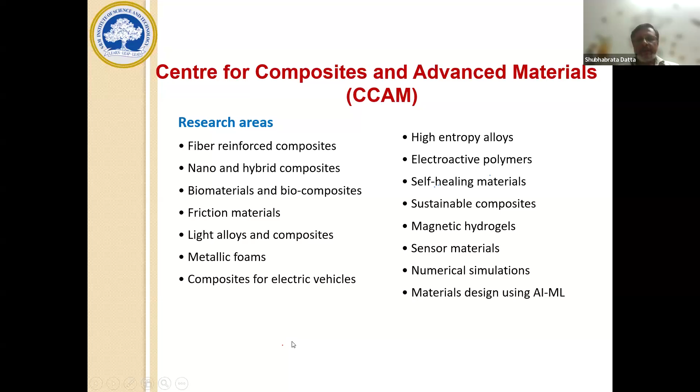In case of all these materials, we do both computations and experimental work. So we have the facilities for both. You can see some research facilities of the center. We have a decent facility for synthesizing composite materials and other materials, both metal matrix composites and polymer matrix composites. We also have a decent simulation infrastructure for finite element analysis, for different multi-scale modeling techniques, and of course AI/ML. So this is a little bit of background of our center.

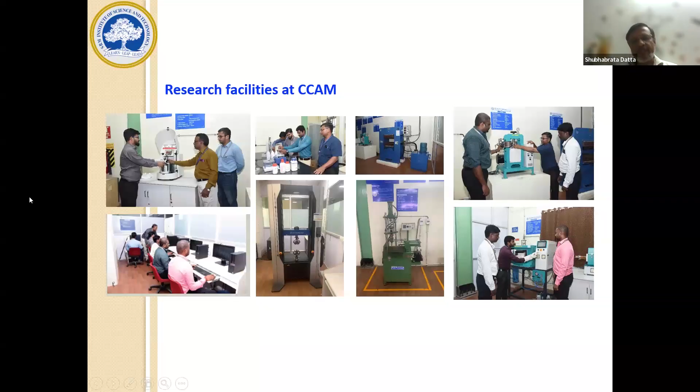Let us come to the lecture. My lecture will start with the concept of design of materials, how a material can be designed. In this case, I'll focus on designing composite materials. Then the concept of materials informatics, how data-driven models and machine learning can be used for designing new materials with improved performance and properties. A little bit on design optimization, where we use a lot of optimization algorithms for designing materials—that concept also I'll explain.

After this introductory part, I'll go for some case studies. I'll try to cover three case studies: the first one on metal matrix composites, then one on polymer matrix composite with particulate reinforcement, and the last one, polymer matrix composite with continuous fibers. But all three applications will be in the field of biomedical implants.

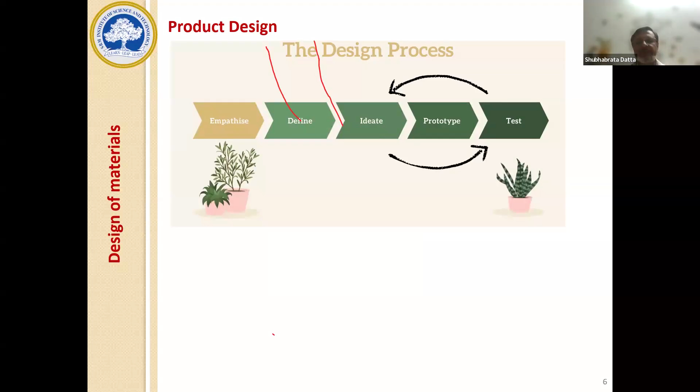So first, to start with design of materials. Any product design, if you know these things, starts with empathize, then we define the problem, ideate the problem, create some prototype, then test the prototype. Whatever shortcoming we find, we come back to the ideate part, try to find the solution, make the prototype and test. This is the basic concept of designing anything.

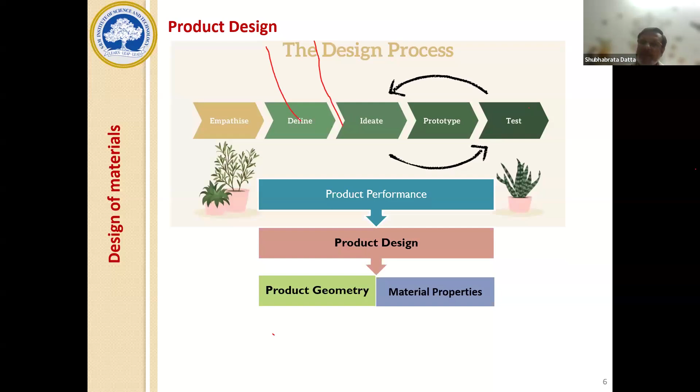Now in case of a material, or any product made from materials, product performance depends on the product design. Product design depends on two things: one is the product geometry, any component, any machine we are making has this geometry part, and second is the material's property.

When we are trying to design a material property, or achieve a certain property in any material, we have two things in our hand which we can control: composition and processing. Composition and processing leads to the microstructure, microstructure leads to the property, and property leads to performance.

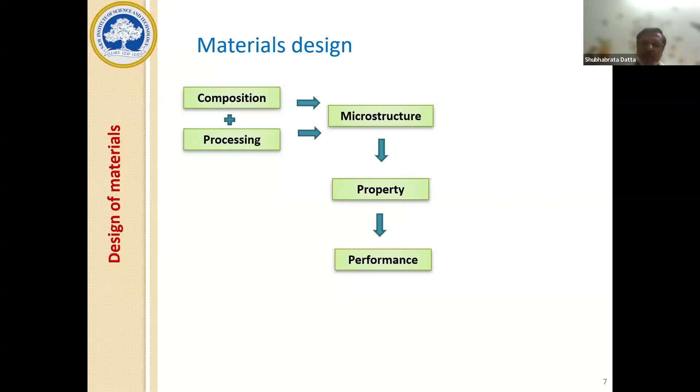Performance means for a particular application we may need a combination of several properties, maybe strength, maybe corrosion resistance, maybe something else, maybe a combination of some conflicting properties. All these things come into picture.

If stiffness is not enough, it can bend upwards. If the strength is not enough, it can break. If the toughness is not enough, it can go for brittle failures. If it is too heavy, the weight is high, then also we can face problems. So there are several properties, a combination of which actually leads to the performance of any material when applied to a particular application.

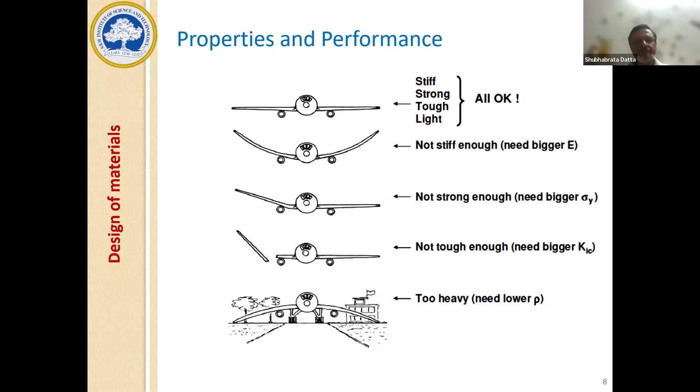Coming to a little bit of evolution of materials, the application of materials has changed with time. Majority of materials were initially polymers, mostly natural polymers like wood, skin, fibers, before the Christ era situation. Then composites were there, like straw brick, papers, ceramic glasses we started using, like pots and these kind of things.

Then slowly when metal came, metal dominated the applications. All engineering applications were dominated by metals. We started with copper, bronze, then the Iron Age came, we started using iron, then different alloys, light alloys, super alloys, titanium, all these things came.

From the later half of the last century, things have started changing again in the reverse direction, and we are trying to reduce the application of metals due to its different aspects, like one is definitely the density. We are trying for lighter materials, and also corrosion properties and all these things. So naturally polymers are taking a big role in engineering applications, and composites are also growing. In this century, composite is going to play a big role in all engineering applications, due to its certain advantages, mostly its lightweight and also its durability.

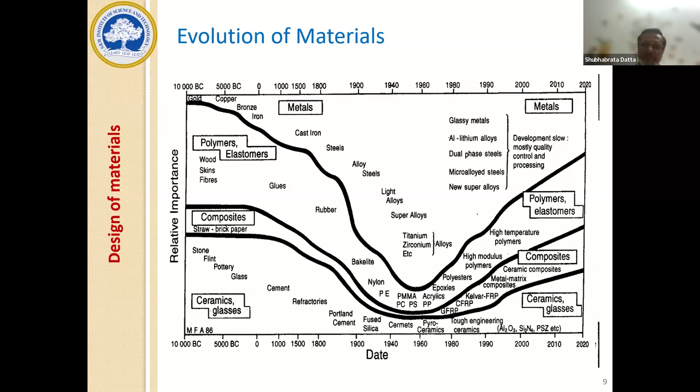Designing a material, when we are targeting a particular property for a particular application, there are two approaches we can go for. One is we can go for a lot of experimental trials, and try to find a suitable composition, suitable processing route for which the material can be used for the particular application. This approach takes a lot of time, and expenses are also high. On the other hand, if we can design the material computationally, and then after designing go for the experimental trial, definitely the cost will be less, time will be less. So naturally, from that point of view, computational design of materials comes into picture.

Computation means modeling, simulation, and optimization. In case of analytical modeling or science-based modeling, you have one governing equation, you start with that equation, and try to solve it either through numerical analysis methods like finite element. Yesterday we had a couple of lectures on finite element analysis and how it can be applied to composites. So that is one approach: you have some governing equations derived from fundamental science, and you try to solve it for a particular component, a particular composite, going through some sort of simulations.

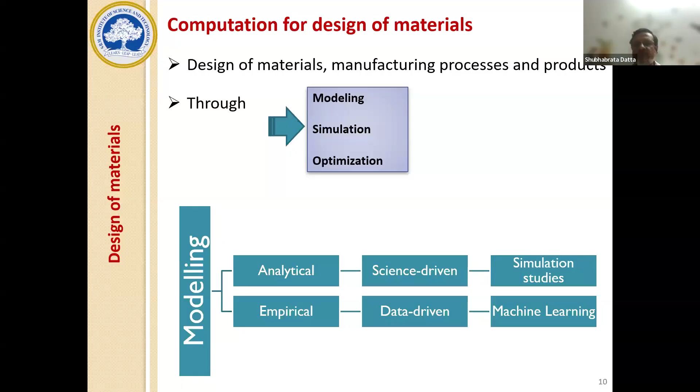And that is another approach, generally called empirical models. Empirical models are basically data-driven models, experience models developed from experience, not from fundamental science, where we have the applications of machine learning and AI in general.

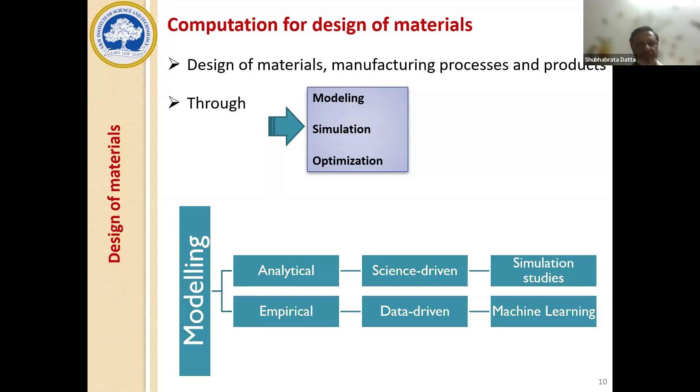Now coming to composites, these fundamental things we all know, probably discussed yesterday too. We have composites where particles are incorporated as reinforcement. Then there may be short fibers, and finally continuous fiber composites, which is called lamina. When we stack different laminas, it is called a laminate. This is one way of classifying composite materials from the reinforcement point of view, based on which type of reinforcement you are putting inside.

The other way is to classify composite materials from its matrix material, that is, either metal, polymer, or ceramic.

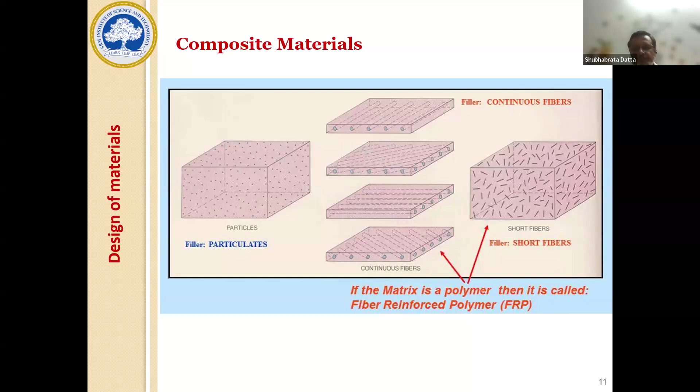In case of composites, the properties depend on certain factors, certain variables. We can call them design variables. From the optimization point of view, we call them design variables, and even for simulation, people call them design variables. These design variables for composite materials actually determine the final property of the material.

First is the matrix material, which matrix you are using. The reinforcement material can be more than one type, which is called a hybrid composite. So whatever, single or multiple reinforcement types, the volume fraction of the reinforcement material, how much you are adding, and the fiber orientation in case of lamina.

If you are going for continuous fiber reinforcement, then the fiber orientation of the lamina is very important. As you have probably studied, when you put fibers in a lamina, it doesn't act as an isotropic material, it becomes orthotropic.

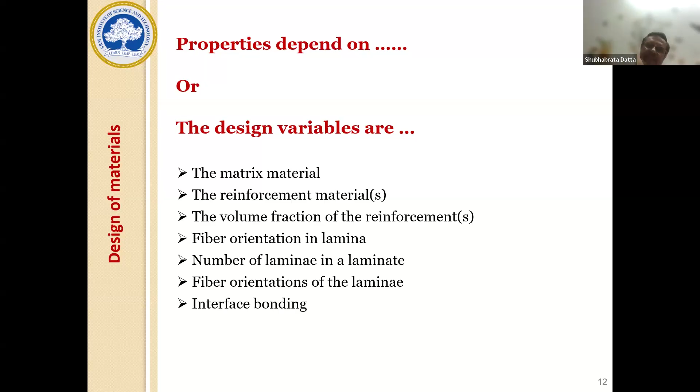So the number of laminas in a laminate, the number of stacks or layers you are creating, and the fiber orientation of each lamina matter. That means for each layer, what is the fiber orientation? And finally the interface bonding, that is the bonding between the fibers and the matrix, or the particulate and the matrix. These are the variables which actually control the final property of the composite material.

Now, if we divide these variables into different length scales, at the atomistic scale we have constituents like the matrix materials, fibers, and particulates, which we can model atomistically. Then at the micro constituent scale, we deal with the interfaces between the fiber and the matrix, and the intra-tow matrix in between the fibers.

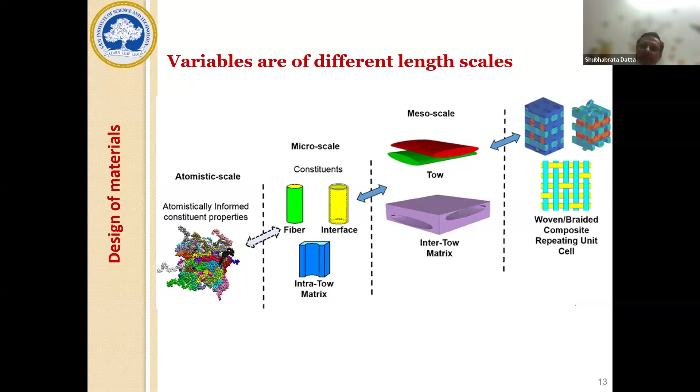Then in the mesoscale, we can think about designing the tow, whether they are oriented in a single direction or bidirectional, woven kind of thing, whatever it is. And finally, we can think about the final laminate or component material, where we can use continuum methods for modeling it.

So at different length scales, we use different tools like quantum mechanics, molecular dynamics, finite element micromechanics, Monte Carlo damage evolution, and laminate analysis. But whatever we use in all these cases, these are analytical approaches. We have governing equations, and in most cases those are already derived scientifically from basic, fundamental science. So we apply these known equations to our particular system, for our work.

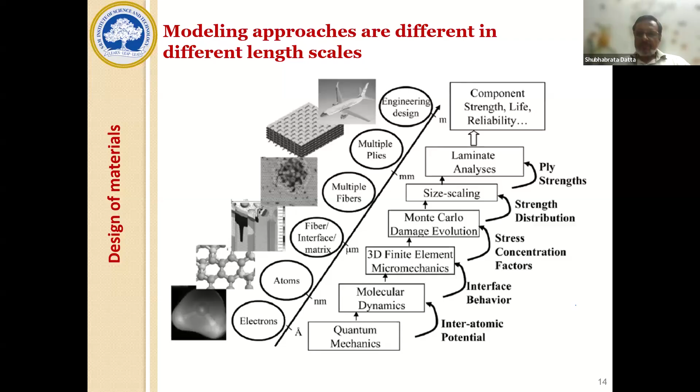In 2011, the US government took an initiative called the Materials Genome Initiative. The goal was to reduce the cost and time to market by 50%. The initiative offers a unique opportunity for the United States to discover, develop, manufacture, and deploy advanced materials at least twice as fast and at a fraction of the cost. So naturally, when trying to reduce the time and cost of discovering and generating new materials, it has to be a computational approach. That's why they named it the Materials Genome Initiative, in short, MGI.

And nowadays, the MGI approach is getting used by several countries.

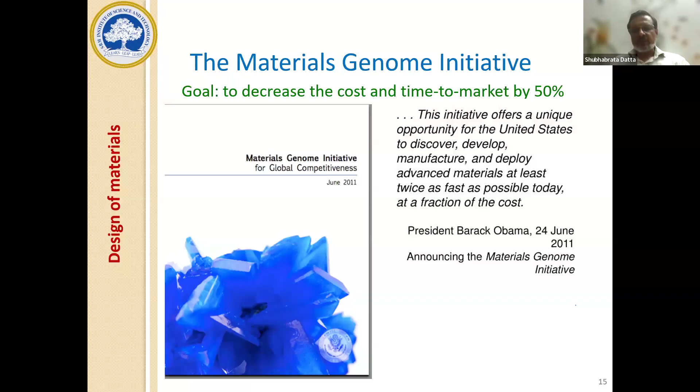It is not only a US factor, but it was initiated in 2011 by the US government itself.

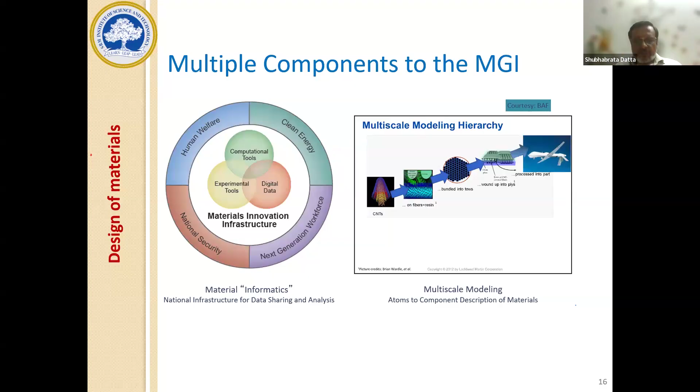So let us talk about materials informatics, because all my approaches are based on this materials informatics approach. In materials informatics, we need data to start with. Then we have to make some correlation between the data, between the variables. Have to add some theory, that means the existing knowledge. And from that, we generate the final knowledge base.

For the data, we need some data acquisition, either from experimentation or literature - I'll come to this point, from where we can get the data. Then correlations can be made through some inference engines, and the physical concepts of the theory, the physical concept of the system, come in the theory part. And finally, from the knowledge base, we can go for the informatics based material design.

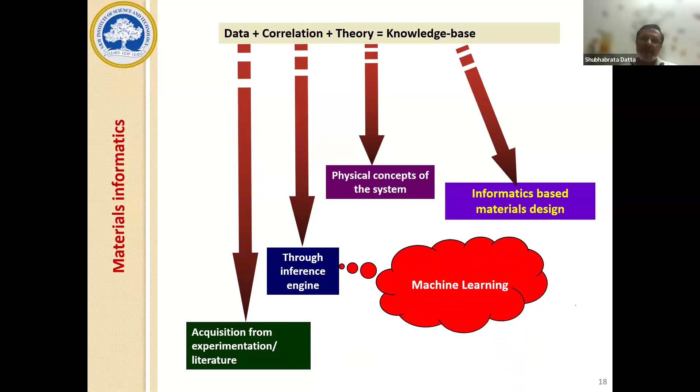Now, in this whole concept, this inference engine can be generated successfully or easily by using machine learning.

Now, when we talk about data, it is a common term, that is data analytics. Now, in data analytics, there are different aspects - if we increase the difficulty level, it can start with descriptive analytics, then go for diagnostic analytics, then predictive analytics, and prescriptive analytics.

So we will concentrate on the predictive and prescriptive part of it. These two parts we use in our work most of the time.

So data analytics involves the actual analysis of the data, and informatics is the application of that information. So when we are analyzing the data, then it is data analytics. Then what we get from the analysis, if we apply that information for any engineering purpose, that is informatics. So in case of materials informatics, when we design new material using the informatics approach, then it is called materials informatics.

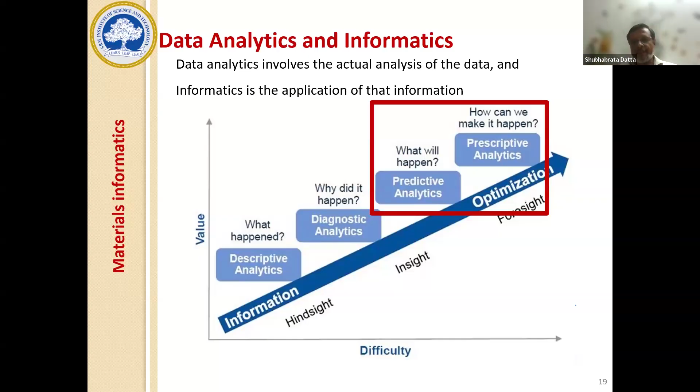So naturally, we can understand that when it is data, it is AI. AI is needed nowadays. Artificial intelligence, we all know, is the development of a smart system and machines that can carry out tasks that typically require human intelligence. So instead of human intelligence, if a machine or system can work similar to a human being, then it is artificial intelligence.

Machine learning, which is nothing but a subset of AI, is where the machine learns from data or the information we are supplying to it, and develops some correlations so that it can make some kind of new decisions out of it. And deep learning - though I'll not go into the deep learning part - is a subset of machine learning, of course.

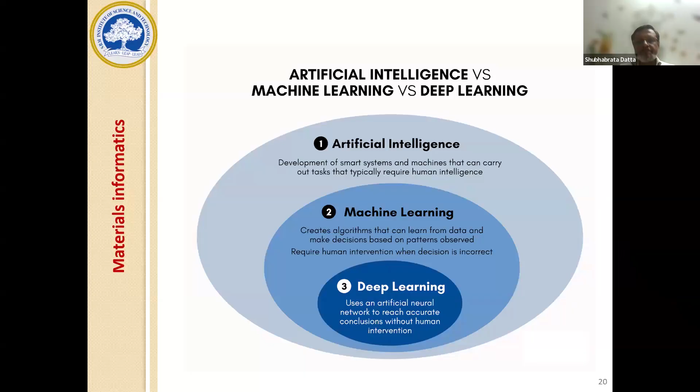Now, why are data-driven models required in materials? In materials, the data-driven approach is not new. It is coming from maybe the last 70, 80 years. We are using a lot of data-driven models.

You may know about the famous Hall-Petch equation, which was generated from data. And then there were a lot of transformation temperatures, carbon equivalent, a lot of things which were all generated from data. So this empirical modeling, or say data-driven modeling, is quite common in case of materials engineering.

The purposes are analyzing the data to get a better understanding of the system - for example, the role of independent variables - developing a mathematical correlation between the inputs and the output, effective when physics-driven models are absent or not effective.

So this point is important, because this machine, AI, ML, or say data-driven approaches, materials informatics - this is not for replacing science. When the physics-driven, science-driven models are absent or insufficient to solve a problem, then only we can go for this kind of approach. Otherwise, we should depend on the science.

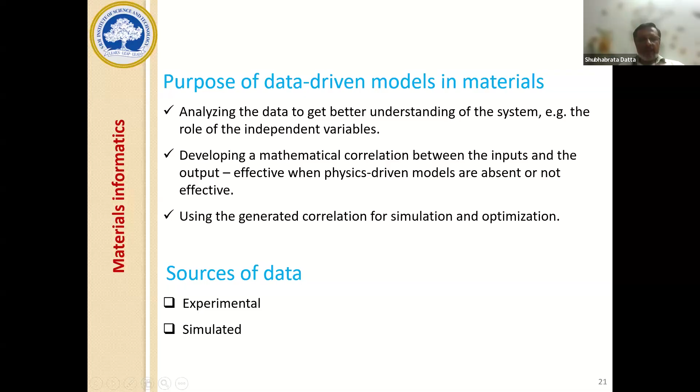Now we are talking about machine learning. Probably nowadays everybody is aware a little bit of machine learning. There are a lot of tools for machine learning, and you can use any of them, or several of them, to try to find which one works better. But in my case, the examples I'll show in this work are all based on artificial neural networks.

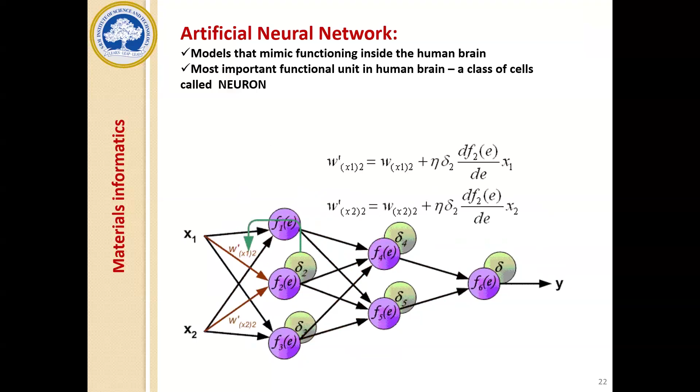So this is the artificial neural network concept. It functions by mimicking the human brain. There are artificial neurons which are connected to each other, and there is a feed-forward approach where initially the signals go in the forward direction.

You send the data input variables, then it makes some predictions based on some randomly generated weights and biases, calculates the error, and then the error is back-propagated to adjust the weights and biases. This process of iterations is called the epoch. Based on that epoch, the neural network finally gets trained - it learns from the data and is capable of predicting.

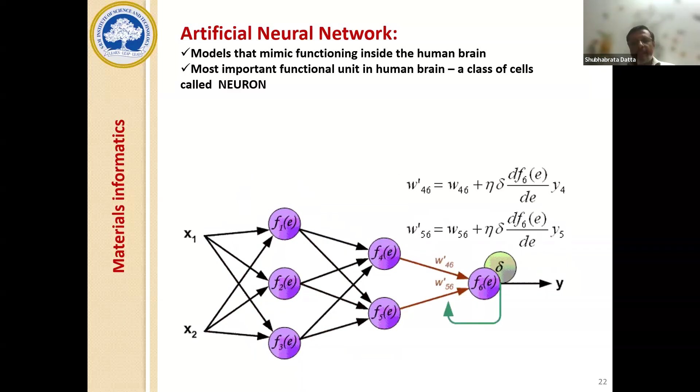Another concept I'd like to mention is the surrogate model. A surrogate model is a model of a model - that means you are not using actual real experimental data to generate a data-driven or machine learning-driven model, but instead using data generated from a model. This might be a finite element model, a density functional theory based model, a molecular dynamics model, or a thermodynamic based model. If you generate a model based on data from simulations of another model, we generally call it a surrogate model.

In my last case study, I'll show an example of a surrogate model also, where I'll use the finite element simulation data for my work.

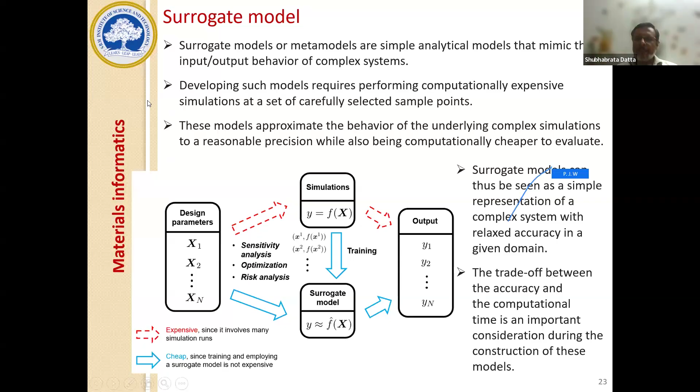Another thing before I go into the case studies, probably the last thing, is the concept of design optimization. When we are designing something using analytical methods or numerical analysis like finite element analysis, we have some target performance. We need that amount of stress has to be, stress should not exceed that level.

Or say the deformation should not exceed that level. In that way, we change the material property. We may, in case of composites, change the fiber orientations, and in that way we try to find in which condition the particular component, or whatever you are designing, is behaving properly, meaning it can be used for that particular application. This is called an adequate design.

That means it can work for your particular purpose, but that may not be the best design. Adequate design is something we can achieve through repeated simulations, varying the variables which we can change in actual real life. We can find an adequate design, but to find the optimum design, the best design, we need to use some optimization.

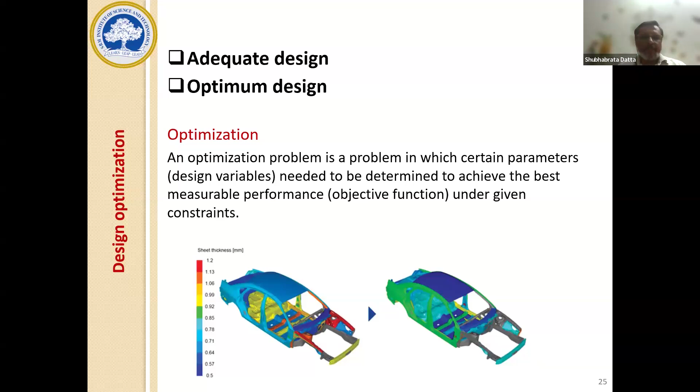So for the best design of that composite material, the type of fibers to be used, the number of layers, the fiber orientations in different layers or different laminae, for these things we need to go for some kind of optimization. In optimization, we have certain parameters to be optimized, called the design variables, to find the best performance of the objective function.

So basically, optimization can be divided into two broad groups. One is called classical optimization, which was mostly derivative based. So we need to make it differentiable, and in most cases it is partial differentiation, like gradient descent algorithms, scaled conjugate gradient algorithms. These are the common classical algorithms. There were a few non-derivative based optimizations also.

But in most cases, the difference is that in all classical optimization, we start with a single solution, we change the position of the solution and try to find the optimum. In such a situation, there is a possibility that you can reach a local minima, not the global minimum. So classical optimization has some limitations.

The new concept that has come after computers came is population based algorithms, or meta-heuristic optimization algorithms, which are basically a parallel computing system where we handle a lot of solutions together, trying to find the optimum solutions independently. So naturally, if some solutions get stuck in local optima, there is a probability that others will find the global optima value also.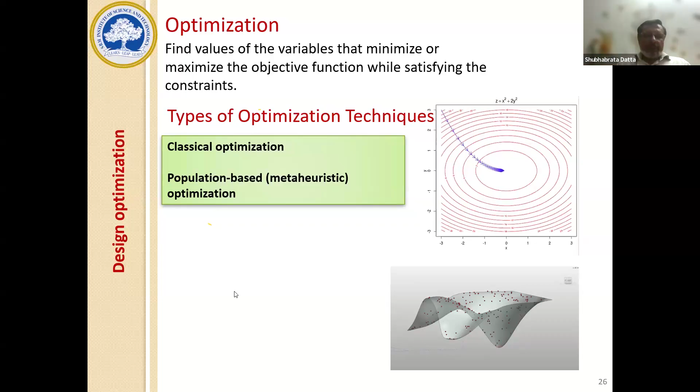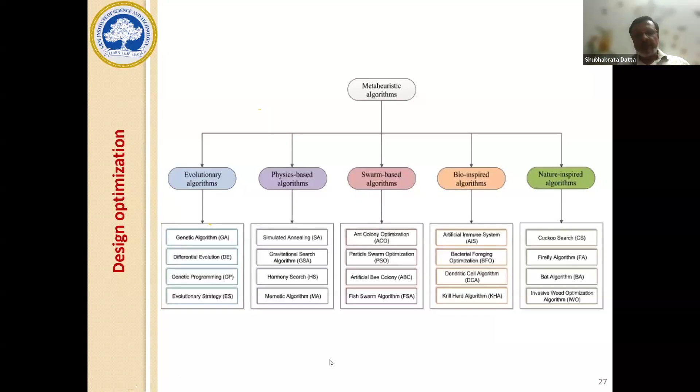There are different meta-heuristic algorithms. Among them, genetic algorithm is the most popular and probably the most tested in engineering application, so I use this genetic algorithm as my optimization algorithm. Genetic algorithm is based on the concept of survival of the fittest, given by Sir Charles Darwin. There are several steps in that - crossover, mutation, selection - all these things are there. By this method, the optimization is generated.

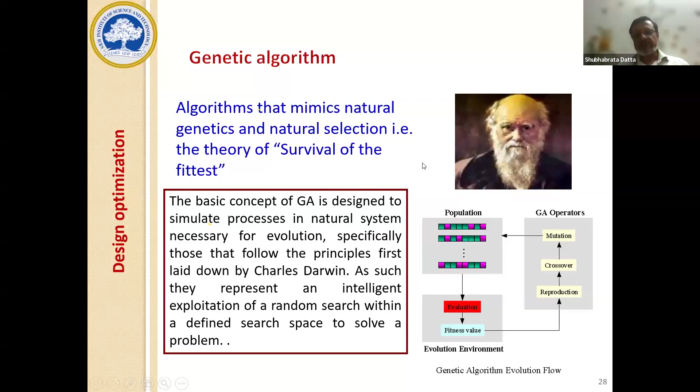I am not going into the detail of the techniques, as you may already know, or if not, you can learn from other sources. Now, when we talk about material performance, as I already told, performance means a combination of properties depending on the application. So we may need several different properties, and in many cases those properties may be conflicting in nature.

Say, for example, strength and ductility. We know that in most materials, if we increase the strength, the ductility gets reduced. But in many cases we need high strength and high ductility, like for automobile components, the car body, we need material with high strength and high ductility. So in this kind of situation, where we need two different properties and those properties are conflicting in nature, we go for multi-objective optimization.

That means more than one objective, and those objectives are not converging to a single point, they are conflicting in nature. In such a situation, we don't get a single solution, we get a set of solutions, called the Pareto front. That Pareto front is a non-dominated set of solutions which are better than other solutions, but they cannot be compared among themselves. So they are all good, they are all optimum, but it is not a single solution.

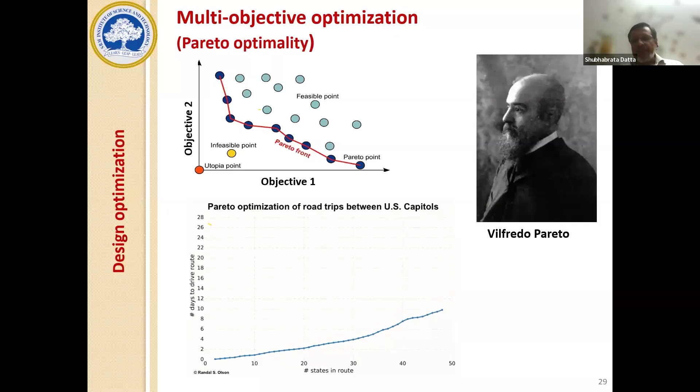Now let us start the first case study.

It is designing of titanium alloy composites for dental implant. We know nowadays dental implant is quite common. It is a kind of screw which is fixed inside the jawbone, and then there is a cap fitted at the top of it, which plays the role of the dental part, the teeth.

And for these, there are certain factors which govern the selection of the material.

Generally, the biomaterials used for any orthopedic as well as dental implants, for any hard tissue implants, stainless steels are used, cobalt-based alloys, mostly cobalt chromium alloys are used, and titanium and several titanium alloys are used.

The most common alloy used is titanium 6 aluminum 4 vanadium, but that material is not meant for implants inside the human body. It is a material developed for aerospace application, but it is used as an implant material because it is easily available. It has a good amount of aluminum, which is not good for health.

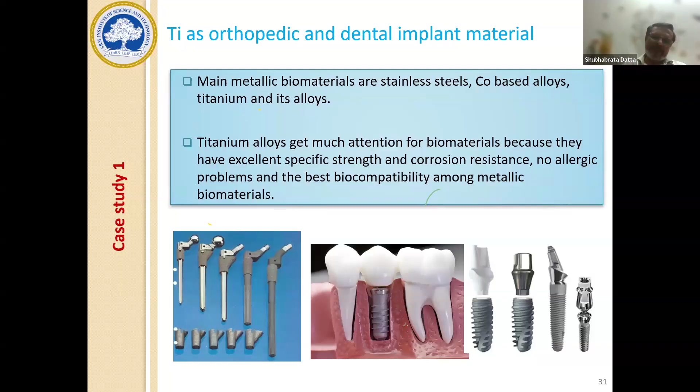So naturally, it is not an ideal material for implants. There are other factors required for any hard tissue implant.

First of all, it should have a good yield strength so that it can bear the load. In case of dental implants, when we are chewing, trying to break something hard with our teeth, it has to bear a good amount of load. So the yield strength of that material has to be good.

And low elastic modulus is also very much important. The stiffness of a cortical bone, the hard bone of our body—there are two types of bone mostly. One is called cortical bone, and another is cancellous bone. Cancellous bone is the softer, porous bone, which is weak. The main load is taken by the cortical bone, and cortical bone has a stiffness of around 20 gigapascal.

And if the implant material has higher elastic modulus, then when the load is getting transferred, it is taken mostly by the implant. So the bone gets a lower share of the stress generated. And if the bone is not stressed regularly and properly, it starts depleting minerals and becomes weak. So for the long term, materials with higher elastic modulus are a problem.

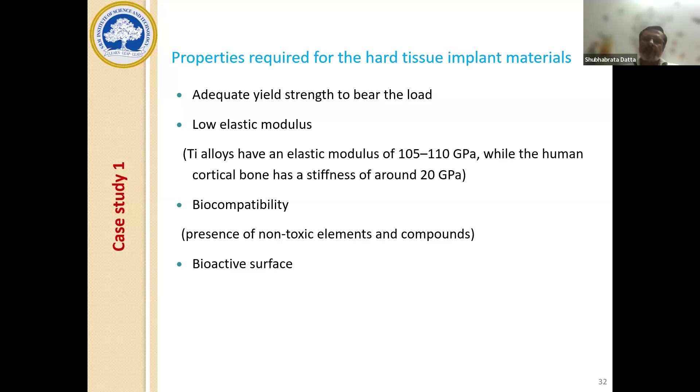So we need a material which has low elastic modulus. We need a material which has to be biocompatible. And if the material has a bioactive surface which can help in generation or regeneration of bone, then we can have better integration of the implant with the human body, which is called osseointegration. So a bioactive surface is also very much required.

Skipping these things, we have to make a model where we can go for optimization, where we try to maximize the yield strength, minimize the elastic modulus, and reduce the cost as much as possible, because there are a lot of alloying elements, and some of them are really expensive. Expensive alloying elements can lead to expensive final alloys.

And this issue of dental implants or orthopedic implants, whatever we are thinking about, in each case, it is mostly a problem of elderly people.

It is better to reduce the cost, to limit it to a certain extent. So certain constraints were applied for the optimization process. The first two constraints are the coefficient of fibroblast outgrowth and the relative growth rate of L929 cells. These were made constraints for the biocompatibility factor, so that the alloy doesn't become non-biocompatible. Another variable is the aluminium equivalent. If in titanium this is more than 9, the titanium alloy's toughness is reduced significantly.

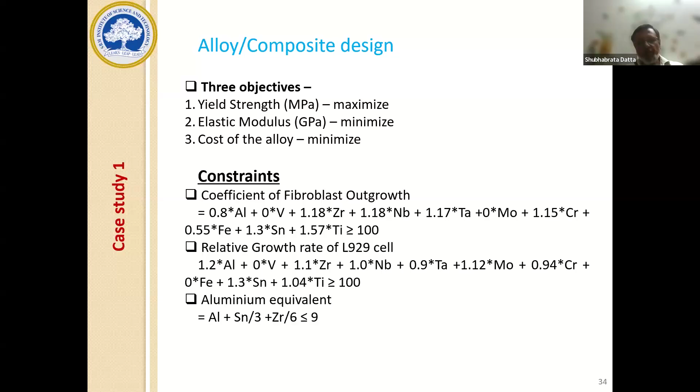So these were the variables. We generated variables for the titanium alloy: the alloying elements, followed by some processing variables like solutionizing temperature, aging time, cooling rate, and so on. And we had two outputs: elastic modulus and yield strength.

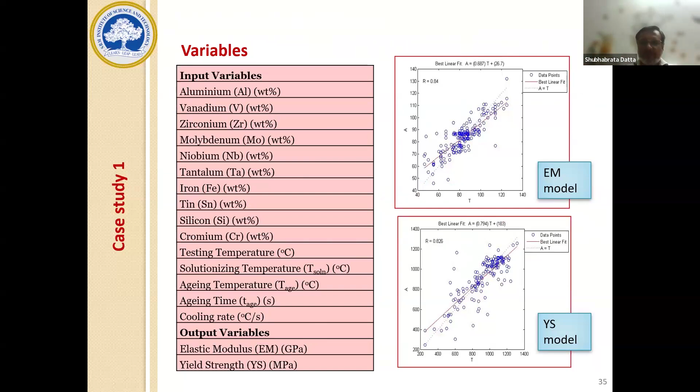So we developed two different data-driven models from data collected from published literature. We generated two different artificial neural network models, one for the elastic modulus and one for the yield strength. There are some simulation studies, not important, I'm skipping it.

Now coming to the point of how to make it bioactive. Generally for bioactive surfaces, to have better osseointegration with the bone so the implant has better integration, the approach is to make a layer of bioactive material, hydroxyapatite. Hydroxyapatite is a variant of calcium phosphate, similar to the composition of human bone.

In the case of making a coating or layer of hydroxyapatite, there are issues like the stability of the layer and how active it can be, among other things. So we thought of a different concept.

Why don't we make it a titanium-hydroxyapatite composite? The titanium alloy is the matrix, and hydroxyapatite particulates serve as the reinforcement, so that it can be bioactive, while titanium provides the other properties.

But the issue was that incorporating hydroxyapatite may increase the modulus of the material. So what we did was think of making a three-layered implant, where the core is the alloy itself, the outer layer is the titanium-hydroxyapatite composite, and in between we have a porous layer to balance the increase in modulus due to the addition of hydroxyapatite.

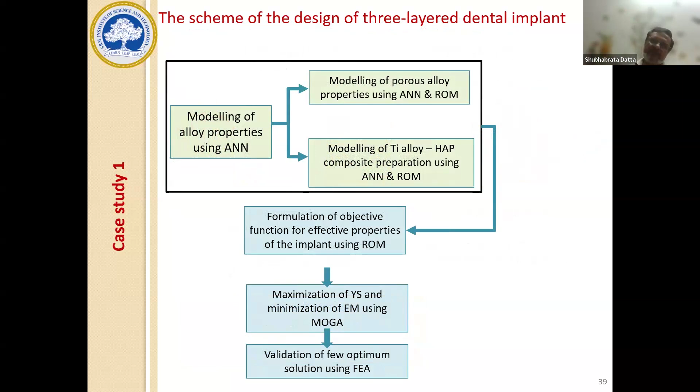So the layer looks like this. Internally at the core it is the titanium alloy. Then the second layer is porous titanium alloy, and the third layer is titanium alloy hydroxyapatite.

For the titanium alloy design, we already generated two neural network models correlating composition and processing parameters with yield strength and modulus. That was one part we've already done, which I showed you. Now the total structure has to be modeled, so we use the rule of mixtures for that.

One rule of mixture is used to find the modulus and strength of the outer layer where hydroxyapatite is applied. Another rule of mixture is for the porous layer where porosity is applied. Combining these different rules of mixture, we finally obtained the elastic modulus of the total component.

For simplicity we took a cylinder-like shape, which will be threaded later. So it started with a cylinder, and there are certain variables: first, the composition and processing parameters; the volume fraction of how much hydroxyapatite can be applied at the outer layer; and the radius of the inner layer and middle layer, which we call R1 and R2.

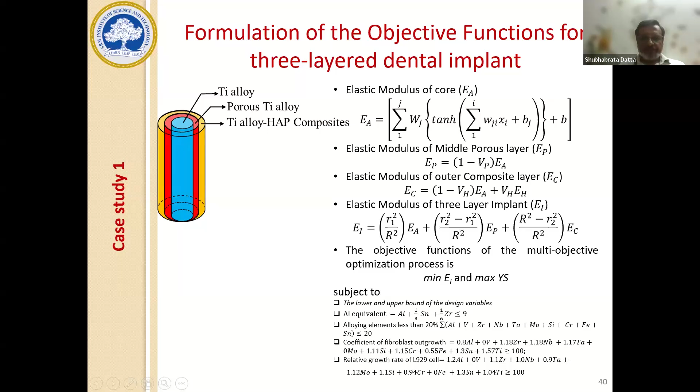In this way, we formulated the objective functions, one for modulus and another for yield strength, and used a multi-objective genetic algorithm for this study. Under different optimization conditions, we performed multi-objective optimization and obtained these Pareto fronts for different conditions, condition one, condition two, as written at the bottom of the figure.

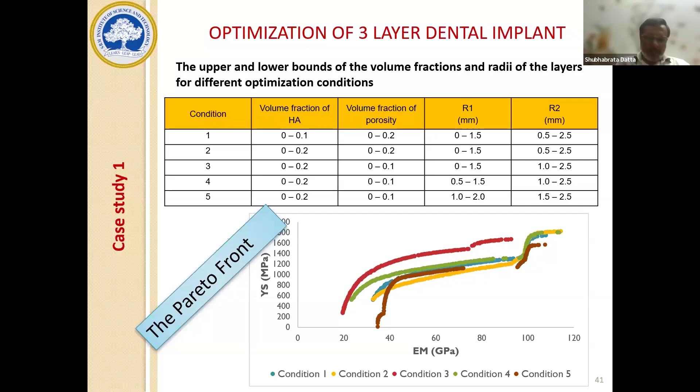We got several results, and it was found that the red color, condition three, gives better results compared to the others, because its solutions have higher yield strength and lower modulus compared to the others. So we studied how the design variables behave behind those Pareto fronts.

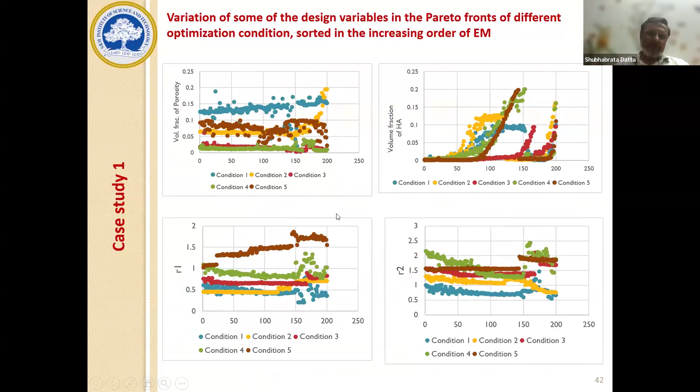We studied those solutions, and we went for some solutions where particular solutions were collected, and on the basis of that, we made the alloy through mechanical alloying concept. We made the three-layered composite.

The middle layer, the porous layer, was made using some spacers, which are common for making porous titanium alloys. People use it for making titanium foams also. So those spacers we have used to make the porous layer, and the outer layer we have used hydroxyapatite. So this was the concept. From there, we took three solutions out of it, and we made it successfully. I'm not going for the experimental part because that is not the purpose of this lecture.

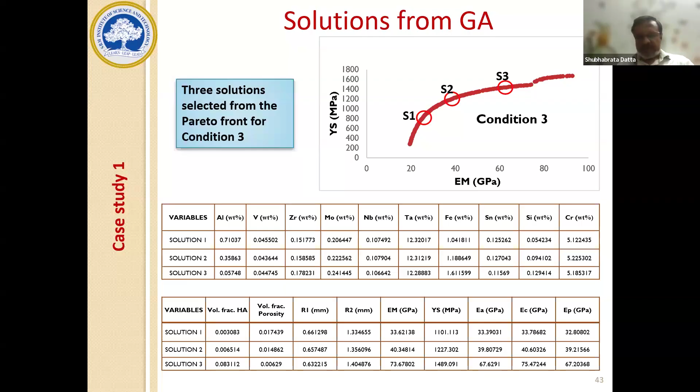So it was done. Now coming to the second case study: designing hybrid ultra-high molecular weight polyethylene composites for total knee arthroplasty.

You know about hip replacement and knee replacement. For all these things, there are certain materials like this plastic liner in case of the knee replacement, and similarly in the hip replacement. We need some materials which can act as a cushion when there is rotational movement in both knee and hip. In those movements, we need some cushioning materials that work in between two metallic components, so that there is no direct metal to metal contact.

For these materials, we require some properties like good mechanical properties. It should have good strength, because the liner will face a good amount of load. The main problem is there is a wear effect, so wear debris are formed, which can cause problems in the nearby tissues. We also need good biocompatibility of the material, and if possible, make it a bioactive material also.

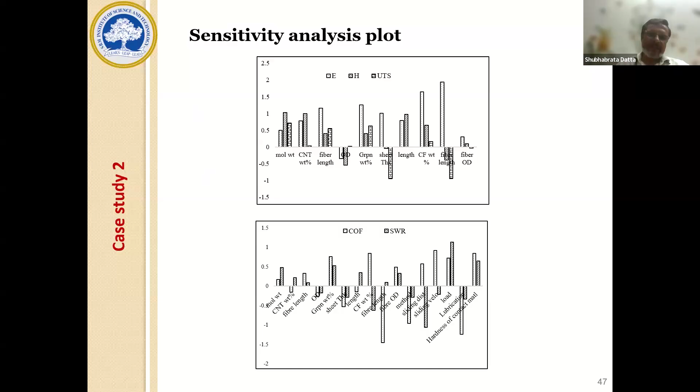We did some sensitivity analysis to find which variables are influencing the output in which way, because it was a complex system we were handling with so many different types of particulates we were adding. So we tried to understand the system and generate some understanding, then we went for some optimization.

When we did the optimization, we found that for the different molecular weights of the matrix material, that is the UHMWPE -- in the market also you can get UHMWPE of varying molecular weights -- if the molecular weight is increased, definitely the strength increases and modulus increases. So we were trying to find for which molecular weight we are getting better Young's modulus or better UTS.

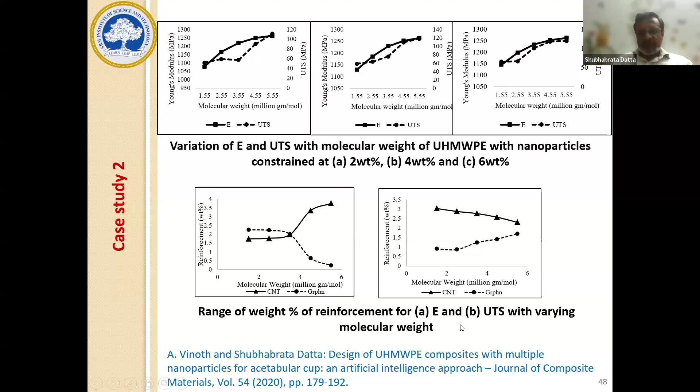We were also trying to find that for different molecular weights, how the requirement of CNT, graphene, and carbon fibers are varying. So from the optimization point of view, we were trying to find those results.

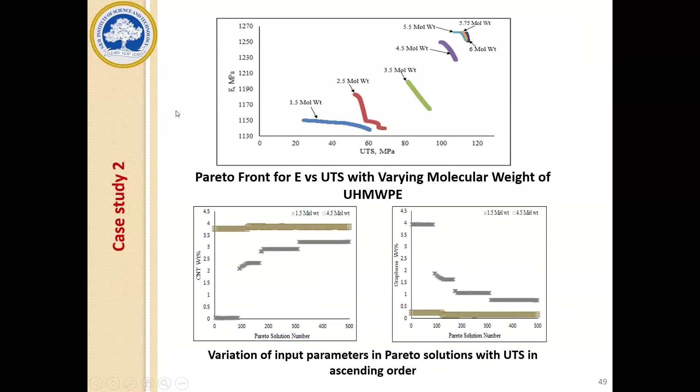The Pareto front, where you can see this is elastic modulus versus UTS, and with the varying, we were trying to maximize the modulus and strength both. Strength has to be high because it has to bear a good amount of load, and modulus also we are trying to increase, because higher modulus means lesser deformation during the loaded condition. So if the liner material deforms less, there will be less possibility of wear. So we are trying to increase both things, and these are the Pareto fronts for different molecular weights of the matrix material.

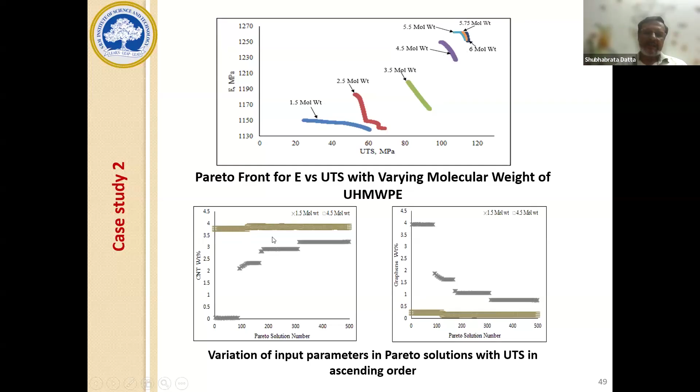From that we found the zone which is better, for less material and also for less molecular weight of the matrix material, and for the high, like 4.5, matrix material, how the solutions are varying - that means how the CNT content is varying, how the graphene content is varying.

In this work also, we went for making the materials. We actually made different solutions, first with two materials, then with reinforcements like carbon fiber - started with CNT and graphene, then we added carbon fiber, and even in another extension of this work not shown here, we took the database of hydroxyapatite also, which was the fourth type of particulate. We made all possible combinations and characterized it, and found in some cases it was giving excellent specific wear rate.

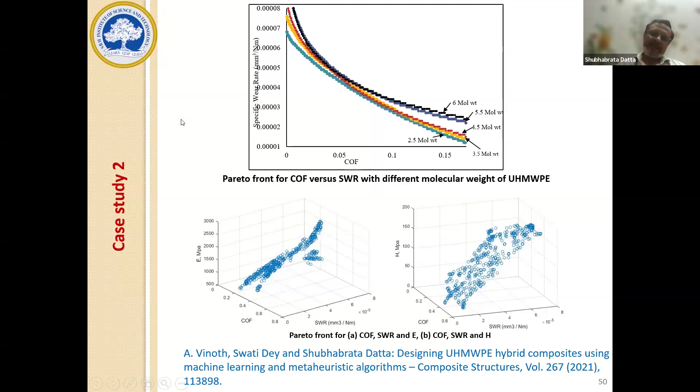Now let me go for the final case study, designing the FRP fracture plate for periprosthetic femoral fracture. I'll explain what that is.

So this thing you may have seen somewhere - this is the femur bone of a human, and this is the fracture of the femur head. It is also quite common, particularly for aged people. They fall down due to some reasons, and there is a fracture at the femur head, then the femur head is replaced by this implant. This is the gray colored implant you can see, the common implant type which is inserted inside the bone.

They remove the top certain portion of the femur bone, particularly the broken head, and instead this implant is inserted inside the femur bone, and now we have a new femur head, a metallic femur head - in most cases it is metallic.

Now, due to the presence of this femur implant, there is a possibility of some kind of disbalance in the load transfer - the load transfer may not be in the proper direction. Normally, the normal body weight load is transferred straight through the two legs, but if there is an implant in between, there may be some difference in the load transfer, which can create some imbalance in loading, and due to that, and maybe due to an accident also, there may be some kind of fractures.

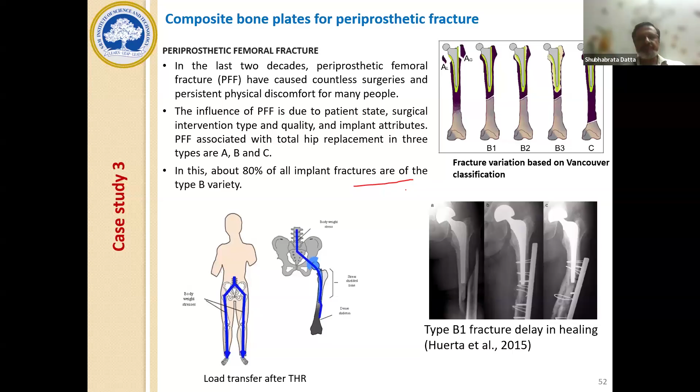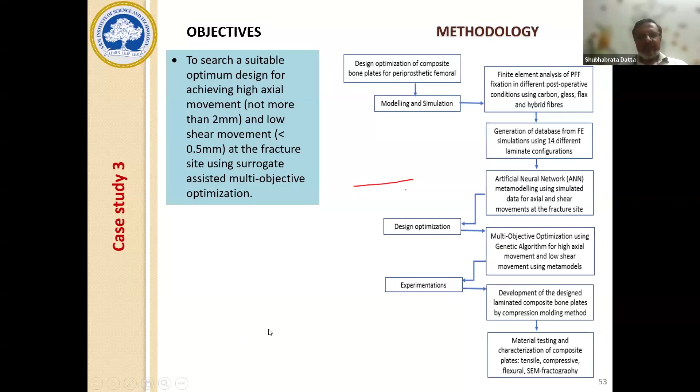We did the analysis for composites having 18 layers of the material, 18 laminas, and also we compared with the titanium 6 aluminum 4V material. So we did a lot of finite element simulations varying the layer orientations and varying the layer materials - layer materials meaning the fiber material like carbon fibers. We tried with carbon fiber, glass fiber, and flax fibers.

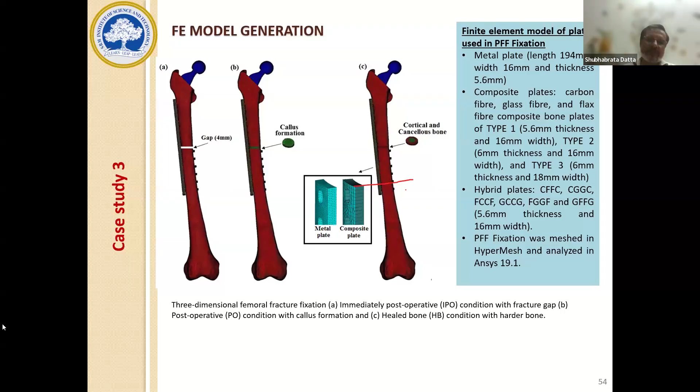So these three fibers we tried, which are commonly available, and epoxy resin was used as the matrix material. Sorry, I made a mistake - it was 28 layers used in the laminate, 28 laminas. So it was a symmetric model: 14 layers in a certain orientation, and the same orientation repeated for the other 14 layers. For the 28-layered composite laminate, we had all the properties such that fiber orientation of layer 1 varied from -45 to 0.

The material property of layer 1 varied from 35 to 121. 35 is for flax, 121 is for carbon fiber, and glass fiber is somewhere in between. So we varied it like this. We had total 28 variables, 14 for the fiber layer orientation and 14 for the fiber layer materials, and we varied it randomly.

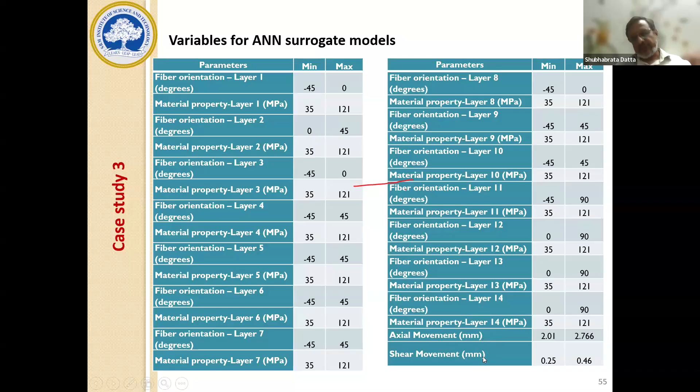We did a lot of simulations to generate the amount of axial movement. We measured the axial movement and the shear movement. If you recall, the target is to maximize the axial movement and reduce the shear movement. These were the two models we generated using artificial neural network, one for the axial movement and one for the shear movement.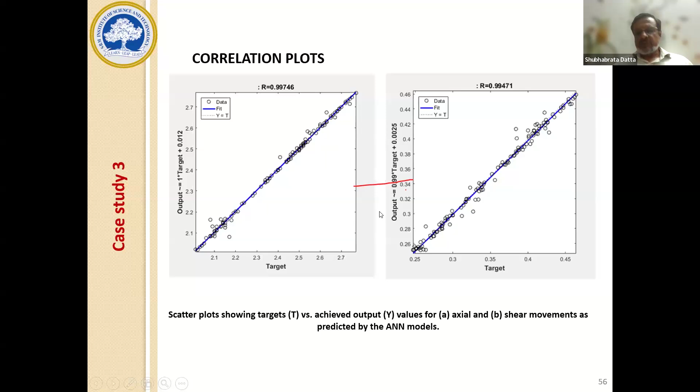We did some sensitivity analysis also to check how the material property, as well as the layer orientations, influence the axial movement and shear movement.

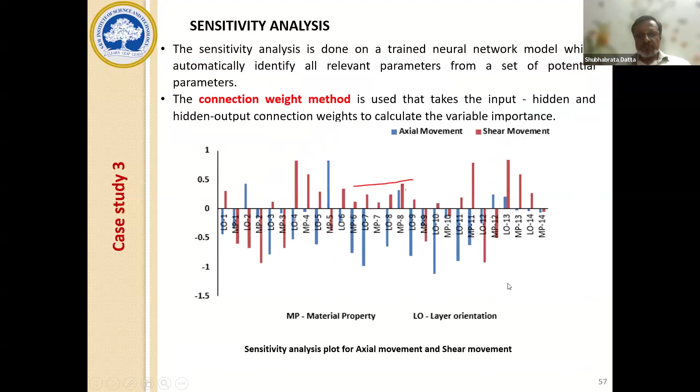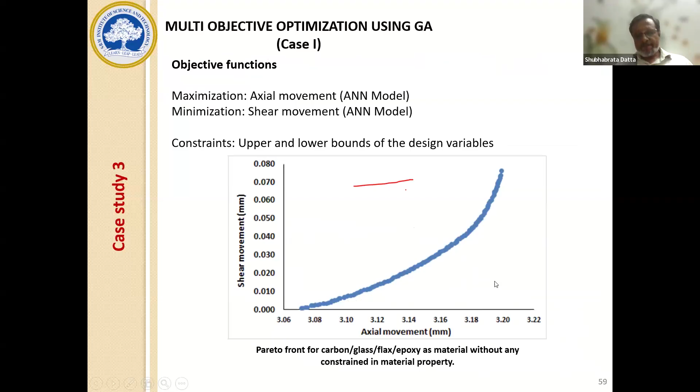Now, when we saw the material property, there are two things we observed. As per the Pareto solutions, how the orientations are varying. Whatever the orientation, it is not difficult to make, because we are going to make it through a compression molding machine. So we can do it for any kind of orientation.

It is not possible to get from the market any fiber like that which has some specific modulus if we just say, give me a fiber of this modulus. So it is not possible. So we had to concentrate on some materials which are available.

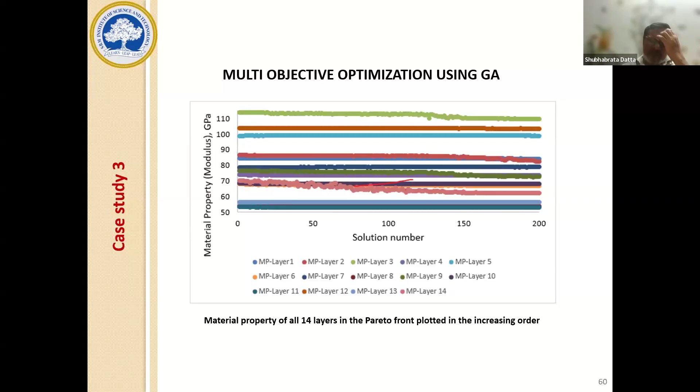So what we did, these are the layer angles we got first. It varied from somewhere near -40 to somewhere near 80 degrees. These were the layer angles for the 14 layers, and that will be symmetrically opposite in the other 14 layers.

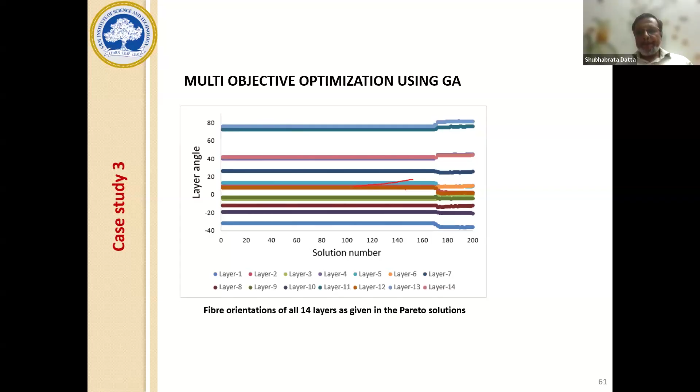So depending on this, these were the material properties. I will show you the predicted material properties. These are the layer orientations, and these are the material properties for all 28 layers. You can see the layer material properties varied, starting from around 45 or 50 to around 110 or so. But it varied randomly, and it is not possible to find those fibers.

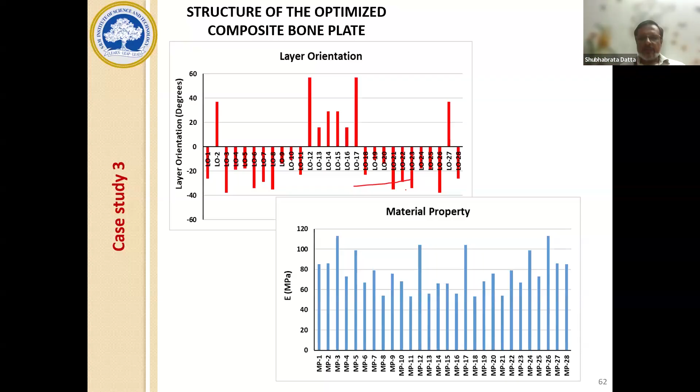So what we did, we made some corrections. We saw that where higher values are preferred, we made the optimization choose the carbon fiber, and where lower values are preferred, we controlled the upper and lower bound so they are bound to choose glass as the fiber material. So we went for the optimization again, and this was the new Pareto front.

You can see in this Pareto front the higher values of the elastic modulus, meaning those layers, layer 1, 2, 3, 5, and so on, where carbon fibers are preferred. In case of the other layers, glass fibers are preferred by the optimization. So this is the fiber orientation for all 28 layers, which were suggested by the optimization process.

Then in that case also, we went for making hybrid composite bone plates with carbon and glass fibers varying in different layers and orientations. What happened is that exact testing for that type of loading condition we could not do, but we have done the general strength and flexural tests, the tensile strength, the compression strength tests, all these things we have done.

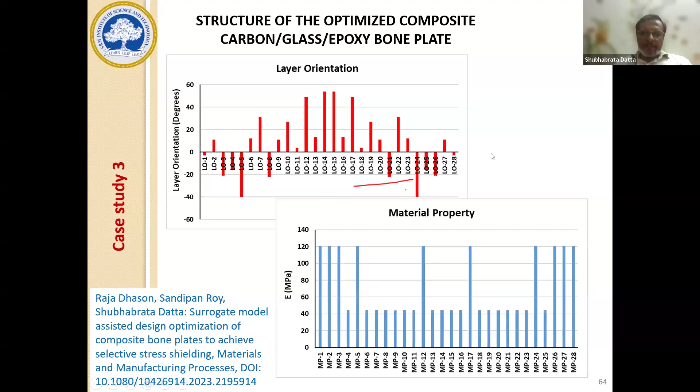So finally, to conclude: several computational tools are available for designing composite materials at different length scales. Materials informatics can also be applied to complex composite systems where AI/ML tools can be effectively used. Optimization tools can successfully be used for designing composite materials with improved performance.

Machine learning based surrogate models can be used for finding the optimum design. The best design we could find was from the machine learning based surrogate models generated from the simulated data. So informatics based design of composite materials can design composites efficiently, reducing the number of experimental trials and thus reducing the time and expenses for development.